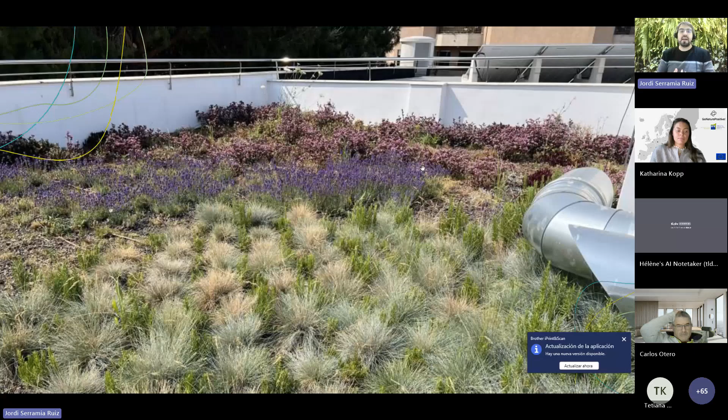So when we started making green roofs, we did this. This is a green roof with a low nutrient substrate. We planted it with this design that has rosemary, festuca, tradescantia, sedum, lavender, and everything is beautiful at the beginning. The green roof starts to grow, the vegetation expands, and we get this. This is the ideal of our green roof with the design we did.

But something is starting to happen. You can see here and here some weeds that are starting to grow. And if you do control, or if you do not do control, I don't know what happens in your green roofs, but what happened to us is...

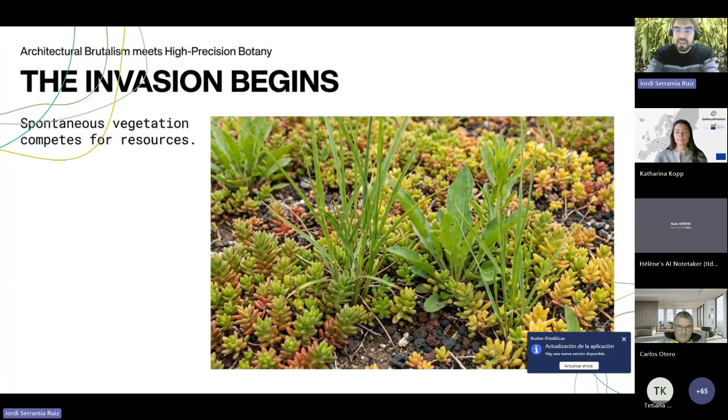Well, you might think that when I'm talking about weeds, I'm talking about these beautiful small weeds that grow in between the sedum, where you'd say 'oh, what a small weed that is growing, let's remove it.' No, I'm talking about that - this is the same green roof you see here from a different angle, and this is weeds. It eliminates completely the design of the green roof, and if you leave them there, at the end almost every original plant of the roof could die to the newcomers.

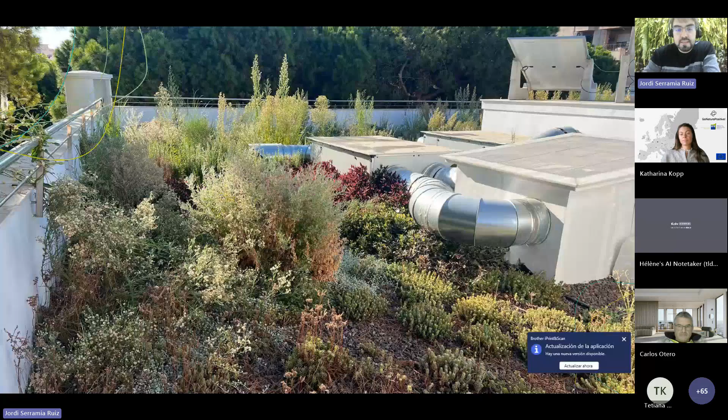So keeping the design needs maintenance, and also sometimes it's dangerous, because you can see here at the left a tree growing in a corner of the green roof, starting to grow, and you can see here the size of the weeds. It's not small weeds growing in the green roof that we can easily remove - no, that's not the problem.

I run a company. Every maintenance job is work and is business for us, but that's not the objective. The objective is to keep the green roof with low maintenance. And the ideal is that you install a green roof and you don't have to do anything - the green roof and the design keep the way they should be.

So that didn't happen in our early years of working, as you can see in these photos. But we have evolved and we have taken measures, and the measures I'm going to talk about, I think, are easy, and you all can take that kind of measures to keep the weeds under control.

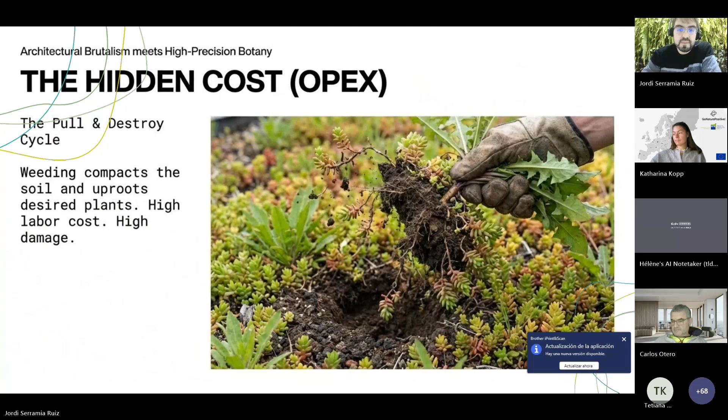We designed a green roof system called Rizoma. I don't want to make sponsoring of our system, because this is not the purpose of the speech. I think everything I'm going to talk about could be implemented in any green roof system you have.

What do we do? The Rizoma system has the usual layers of a green roof: the protection for the waterproofing, the drainage membrane, a fabric for filtering, in that case a rock wool substrate, and most importantly, a weed control fabric - a double weed control fabric.

This thing is usually used in landscaping. I don't know if you use that in your green roofs, but I have never seen a weed control fabric used in a green roof. Maybe because we are worried that a green roof should be something natural, something with biodiversity, and we think that any artificial layer we introduce in the green roof is some kind of betrayal of the ecology or something like that. I don't know, but I don't know why I don't see weed control fabrics in green roofs.

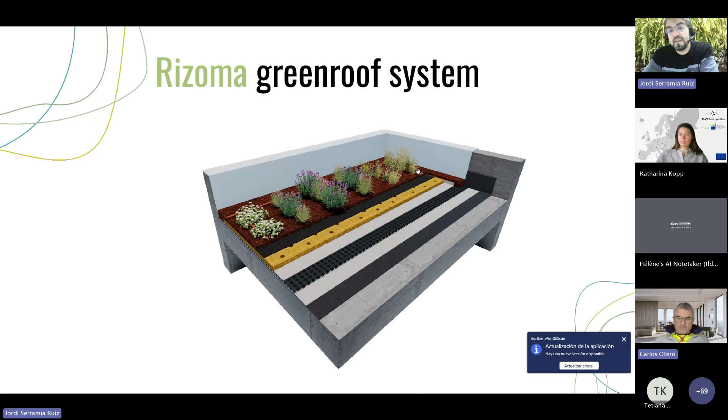Those are the layers: the drainage, the geotextile, the substrate, the weed control mesh, and the gravel. And this is how we installed it. We put the rock wool substrate over the drainage layer, as you can see. The rock wool already has holes for the plants to be planted. Otherwise it's really difficult to plant that rock wool because it's not soft rock wool that comes in rolls. It's a hard rock wool that comes in panels, and that's important for something I'm going to explain in another slide.

This is the weed control mesh, and this is the irrigation system. The weed control mesh also helps keep the moisture in the rock wool panel. So we solve two problems with only that one layer: we don't have weeds, and we lower the irrigation. I know some countries don't need an irrigation system, but in Spain it's mandatory, and lowering water consumption is very important to take into account in green roofs. The weed control fabric keeps the moisture in the substrate, and we almost halve the water need only with that layer. Then we cover everything with gravel.

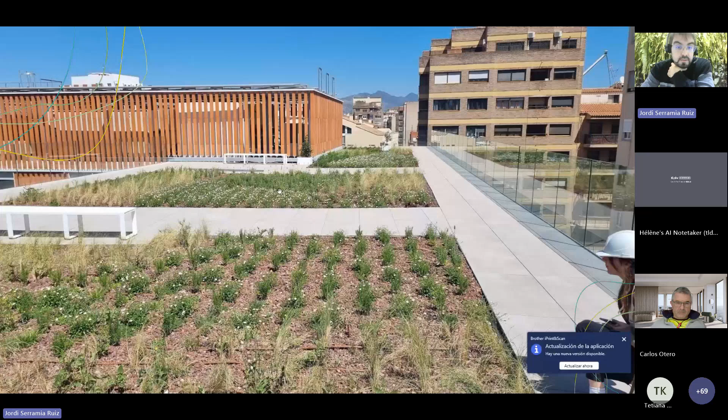You can't totally remove the weeds. There are some weeds growing, but the maintenance and control achieved only by introducing this layer makes a huge difference. I don't know what your experience is, but for us, keeping a sedum carpet with only sedum is really difficult. With that order of layers, we've achieved that. In 4 years, we can keep the sedum carpet as a sedum carpet with very low maintenance.

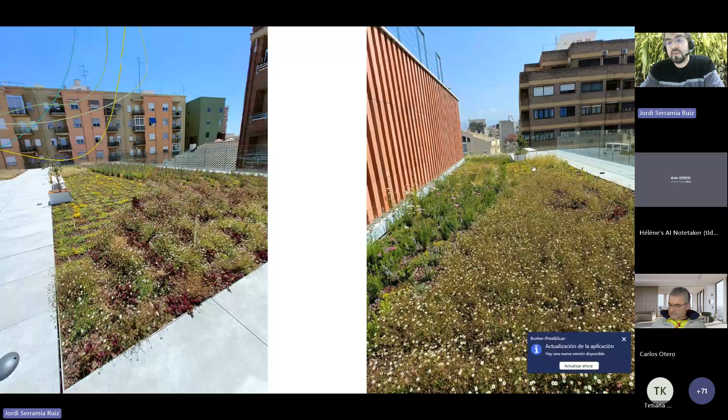This is a different place on the green roof, and you can see the lavender growing here. Sometimes the weeds grow in the same place where the plant is planted, because that's the only place where weeds can grow. But in the rest of the green roof it's really difficult for weeds to establish.

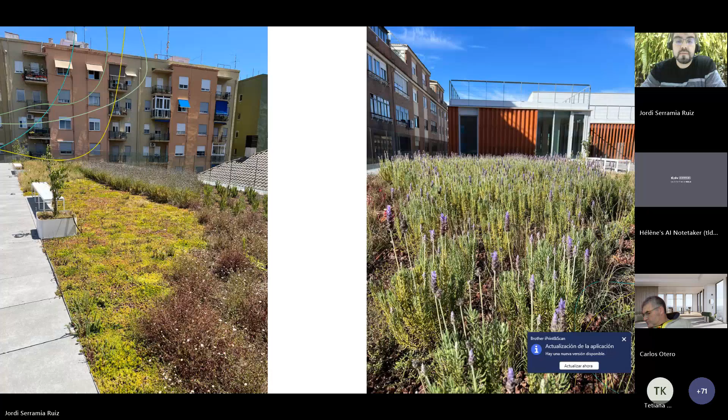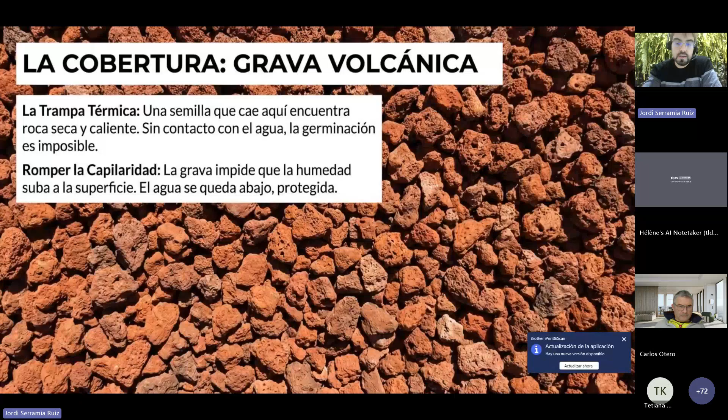The gravel is really important because it's the first barrier. It also gives the green roof weight to keep it in place, so the wind doesn't take it out. And it also protects the substrate from the sun and from evaporation.

The rock wool substrate is important because the moisture in it does not distribute totally uniformly. The moisture stays in the lower part of the substrate, so the upper part is quite dry. Maybe this upper part is 10% moisture, 90% air, and the lower part is 30-40% moisture, 60-70% air.

This is important because if you don't use a substrate that drains a lot, the moisture stays in contact with the weed control layer. If a weed seed germinates on the weed control mesh, and it reaches the substrate while the substrate is humid, it would grow anyway. So the weed control mesh itself doesn't do the job alone. You need the weed control mesh and also the substrate in contact with it to be dry. That's very, very important. Otherwise you won't achieve that purpose.

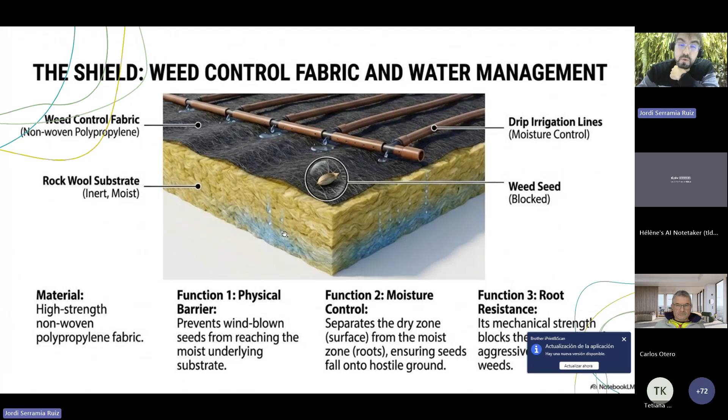We also like rock wool because we can control the quantity of nutrients in the green roof, and this is another important thing we do. The rock wool doesn't have any nutrients; we give all nutrients via the irrigation system. The irrigation system is one of the most important parts of our green roof systems, because we're able to control how much nutrients we give and how much the plants grow.

Let me show you, let me go out of the presentation. This is the remote control we use, and this is the green roof I'm talking about. You can see here all the sectors of that green roof. It has 5 sectors plus a vertical garden, sector 6.

We have some sectors with only water irrigation, and other sectors that give irrigation with fertilizer. So from here, we can remotely control how much fertilizer we give to the green roof. If we see the green roof growing a lot, or maybe having some problem with a nutrient—mostly we have a lack of iron in the green roof and vertical gardens—we can raise the fertilizer levels remotely without being there. That kind of control saves a lot of maintenance for the green roof in the long term.

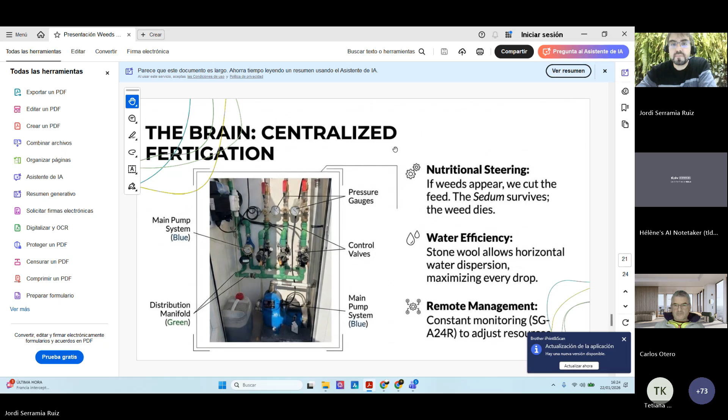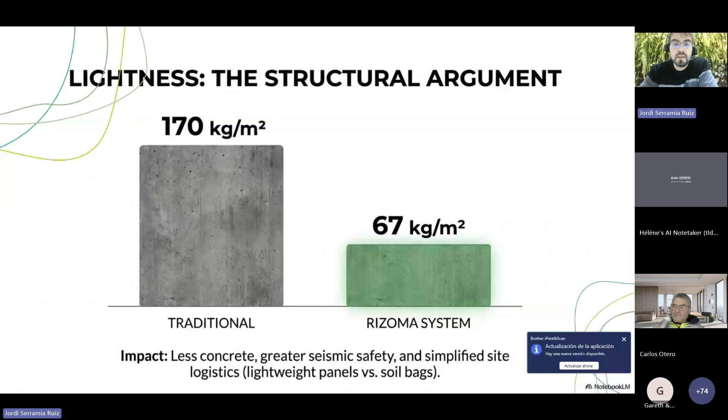Also, these kinds of systems are very light. I mean, 67 kilos per square meter is quite different than 170, which is a regular roof, for plants like lavender, rosemary and that. And this is the final image of the roof.

If you have any question, please ask.

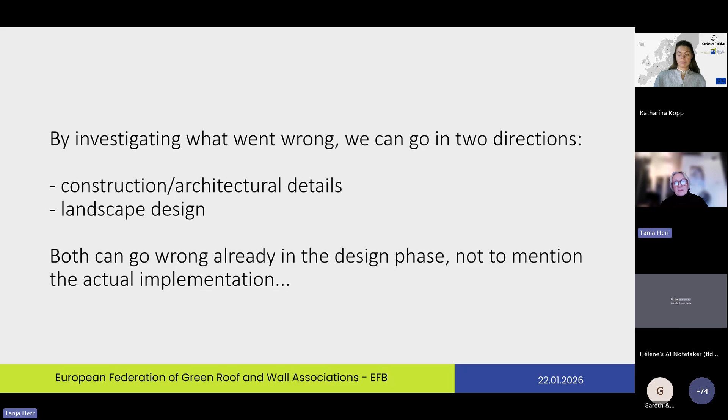I'm talking about Croatia, where we have no regulations, and although there is now substantial practice in it, there is an Eldorado for everybody that hears 'soil, earth, plants.' Then they grab what they can grab the cheapest possible, and sometimes they make very expensive mistakes.

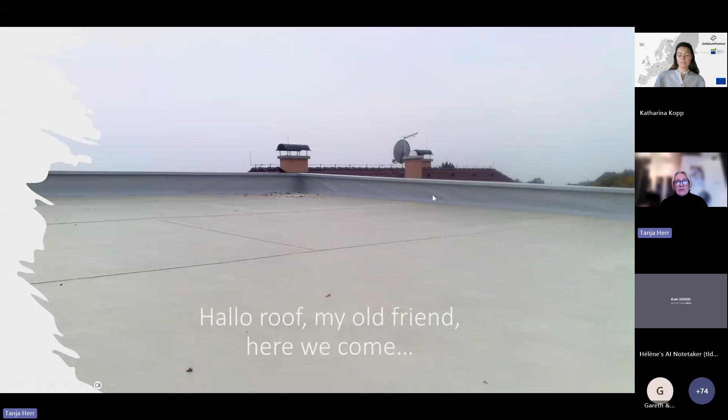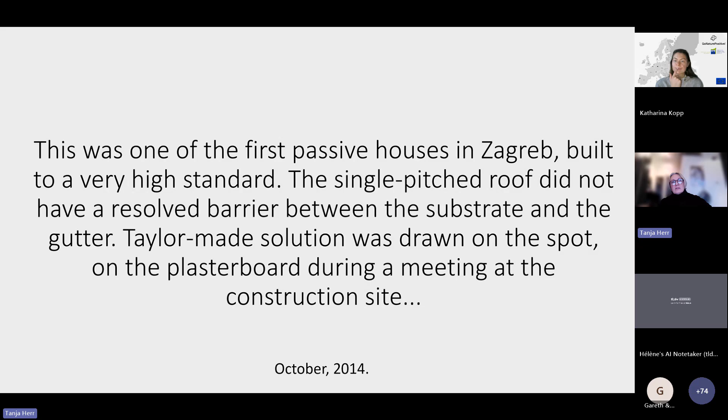So let's go through a few case studies. First one is a private house in Zagreb, the capital of Croatia. A flat roof with a slight inclination of 8%. Three sides are bordered with the attica, as we call it, so it's a little upstand, and there is a gutter at the long edge, where we were supposed first to think of something that will keep the substrate or the green roof system in place, not to slide down into the gutter.

So on one site meeting, I came up with the idea to form a little gabion, or little basket, made of perforated steel, which was equipped with, if you can see it here, a waterproofing membrane stuck to it at the bottom in a very gentle way, so it would not harm the waterproofing. It was basically fixed with hot air welding onto the waterproofing. So no drilling, no invasive attachment, you can see it's all along the membrane. It was just welded, and it was executed by the applicator of the waterproofing membrane.

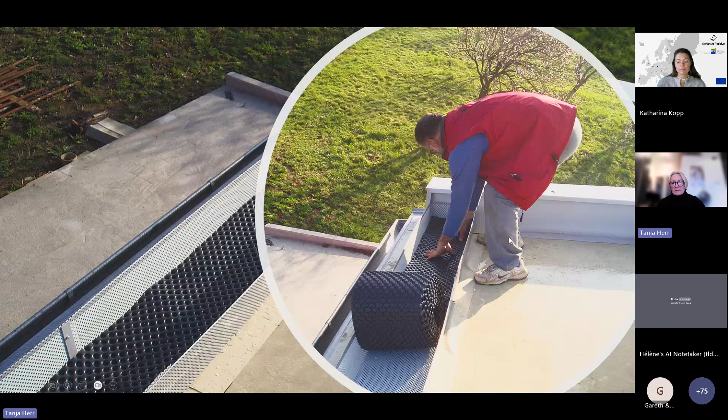Unfortunately, it was a long time ago, and I don't have the exact pictures of this site, which actually later on showed as a problem. So very carefully, we placed the drainage within this basket, where the gravel would come later on. We placed everything before the planting.

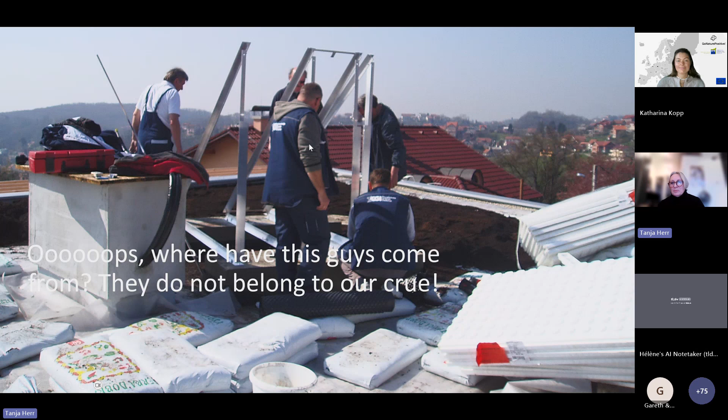Oops, then comes another company. They were just about to install some solar panels, so we said, okay, no problem, you just walk on those EPS drainage elements and use it as a base for your poured in-situ concrete, and we'll all be happy. They were happy, we were happy.

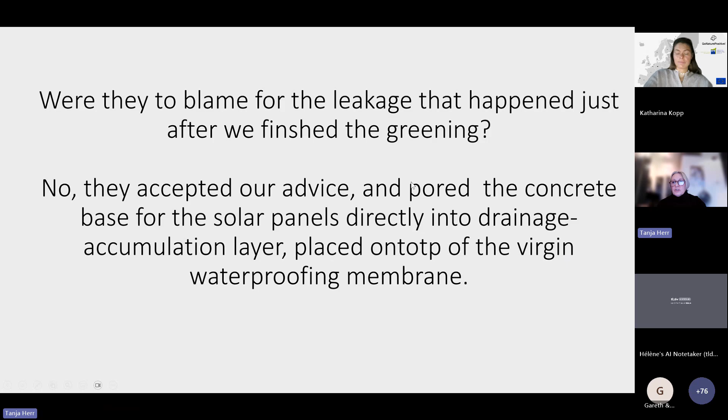But the leakage came, and we actually thought, who is guilty of it. The leakage was present here at the very edge. Why did it happen? It was because the waterproofing applicator made a very poor, clumsy detail, which was okay

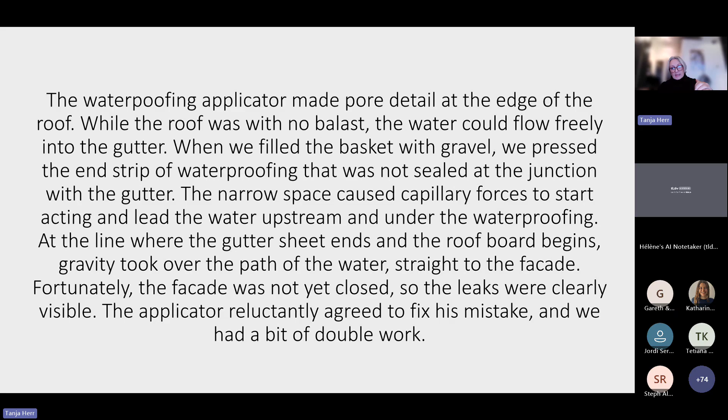while there was no ballast on top of it. Once we put gravel on it, we created a tiny space which caused capillarity to drag the water upwards, and when the water reached the place where it could go down again due to gravity, it actually leaked onto the facade. The installer was not happy when we claimed it was his mistake, but he did it.

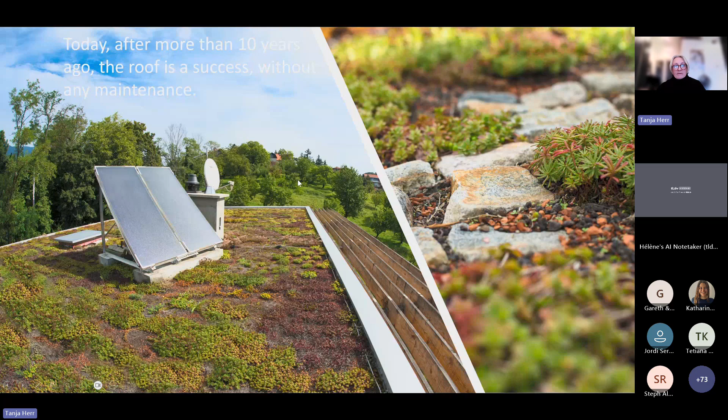no maintenance there whatsoever. So the next case study is the reception of a very prestigious hotel in northern Croatia, where I haven't seen a messier building site than this one. There were 3 new buildings, and this is the old building.

So they connected the old and new buildings with a green roof, under which there was a reception area and a congress hall, so a very posh area. One needed to be very careful. But due to these adjacent old buildings, the green roof substrate for the real English lawn could not be thicker than 10 centimeters, at most.

So we used something rather similar to what Jordi explained previously, just another system. There were dripping pipes sewn into the geotextiles, 2-3 layers of geotextiles, and this is actually the base which enables this beautiful grass to survive on such a thin roof system.

The problem happened when we put the grass on it. You probably all know that you need to water it intensively for the first couple of days or even more, and this is when the leakage happened. It leaked around the water outlets.

Why did it happen? It was due to the wrong tool that the applicator of waterproofing used when connecting the water outlets and the waterproofing. He made very dense zigzag seams, which created capillarities, which later on were not discovered when the waterproofing was inspected by leaving water sitting on the roof for 24 or 48 hours.

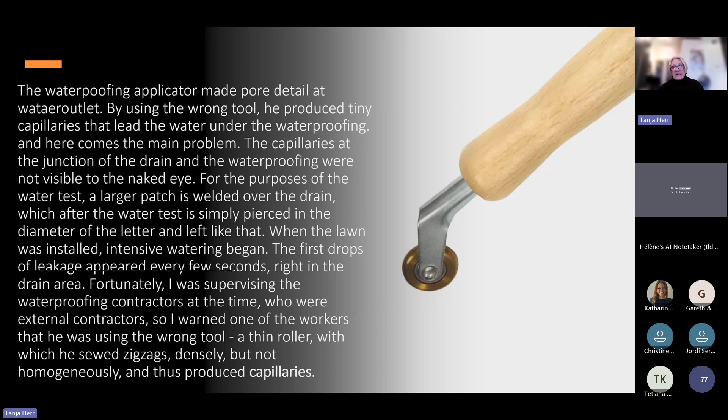Unluckily, because of these capillaries, when you watered the greenery on the roof, the water had access, and it was sucked within those capillaries, and it leaked every few seconds, a drop - it was a nightmare. So we solved this nightmare, and soon enough there was another one.

There were skylights which were covered by the waterproofing membrane until the glazing came. The glazing people came onto the site, cut off the membrane, the rain came, ran off the roof, and the manager of the hotel called me. I was 80 kilometers away from this building, and she said, 'Tanja, it's pouring, it's horrible, what have you done again?'

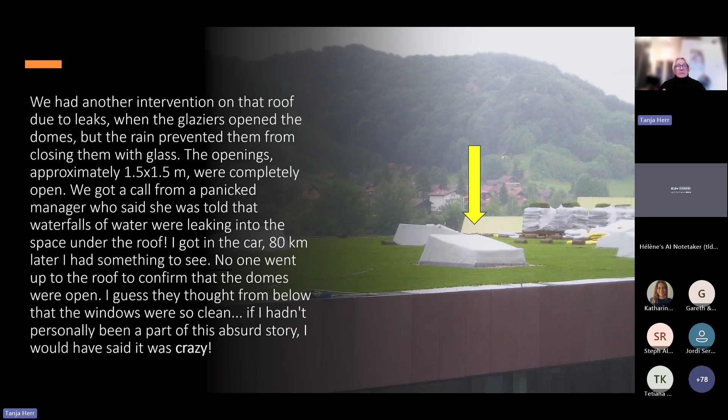So I drove there like crazy, because nobody went on the roof to see that these openings, 1.5 meter by 1.5 meter, were absolutely opened. From downstairs, they probably thought it was the glazing so clean, or I don't know what.

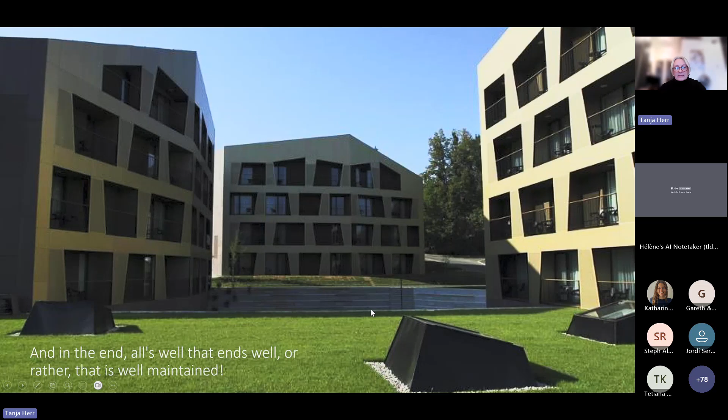But anyway, everything is well that ends well. So this roof was, in terms of leakage, sorted out, and we were happily gone. There was another thing which I will talk about later, again with this glazing, but this is actually another problem. So let's go to the next case study.

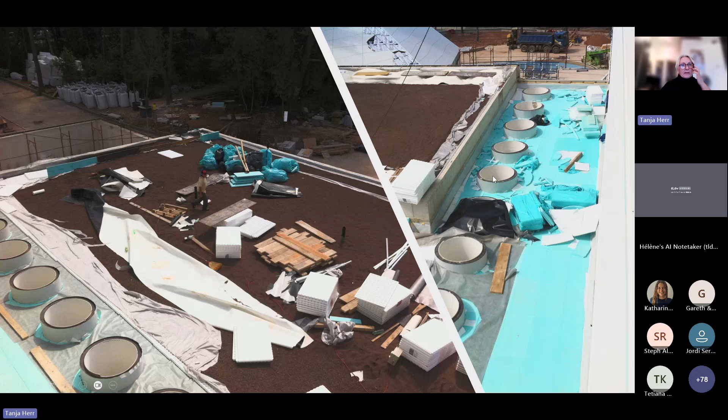Again, a hotel, and a very beautiful design. The architect was very proud, and there was a company that tailor-made those skylights, and there comes the problem.

We've got beautiful protection of the waterproofing membrane executed by XPS, which is a very welcome application. But as you can see here, all these bits and pieces, it was the pressure of time, non-skilled workers, and they were really having a hard time making a nice, round, tight surrounding of these skylights.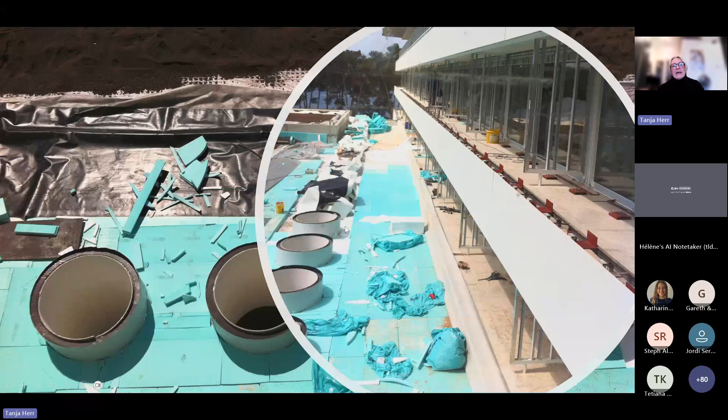So what they did, which was not seen before the landscape company came on top of it - they covered it with geotextile, and they made cuts exactly on the very top of the XPS. These cuts were smeared by some paste or something, which was later discovered when all this beautiful roof needed to be taken down, and everything needed to be repaired.

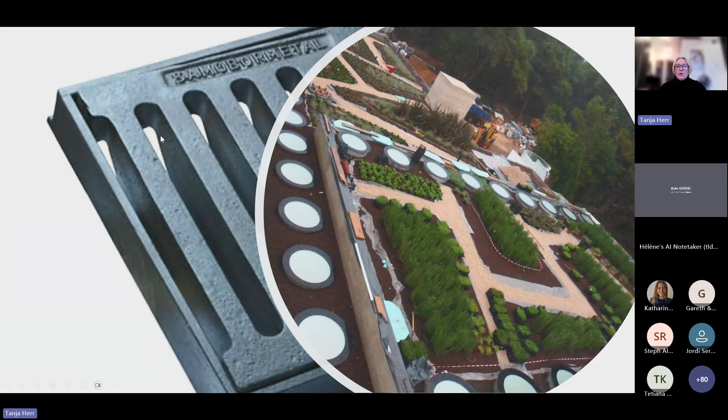Messy building site, rush, non-skilled workers, and another clumsy detail: people who gave the coverings for the inspection chambers.

They put the wrong ones with very big openings, and you can see here this is a Mediterranean pine forest. So over the course of 1.5 to 2 years, the needles went into the water outlets underneath and clogged them. One very heavy rain brought the water level up to those sensitive areas where the installers had cut the membrane and tried to smear it with some non-good solution.

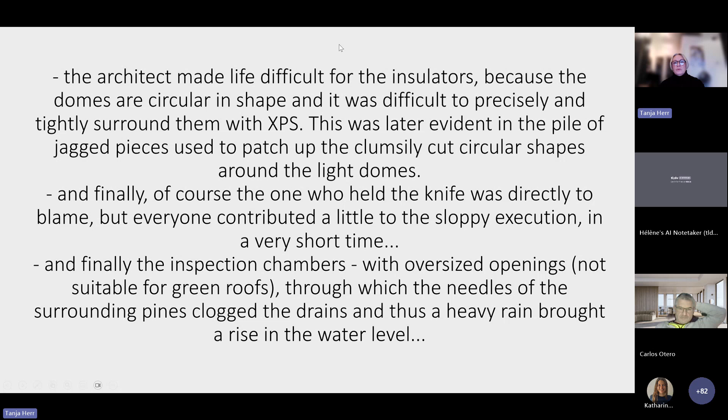I described what I just spoke about as a reminder that there's a mosaic of guilt on this project. The architect who made the skylights rounded, they could have been squared - squared skylights are much easier to insulate properly. Then there was the investor who kept changing his mind until very late, but the opening date of the hotel was fixed. So everybody was in a rush, and some workers were brought in from God knows where. When it came to who was actually guilty, of course the hands of the guy holding the knife are directly guilty, but all the others are also responsible for it.

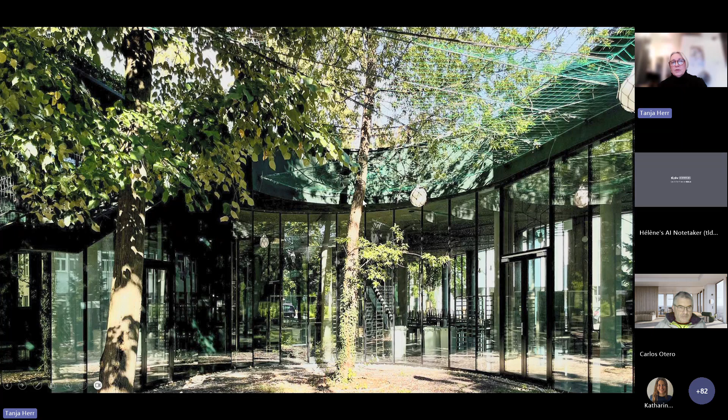Let's go to a very funny, very beautiful, but also a funny case study - this cantinetta serves students of the agriculture and forestry faculty in Zagreb. Nicely done. There was a plan to have containers on these posts for guest professors. This was never built, but for those containers, if you can see the little bump here, they provided pipes for sewage and water.

The only solution we tried to implement on site - this was with my colleague from the XPS company - we said, okay, can you at least split the thickness of XPS into two layers of 5 or 6 centimeters rather than having all the XPS underneath the membrane. This would help with further maintenance so the green roof could be maintained safely, while the waterproofing would also be protected. Little did we know how this would end at the end of the day.

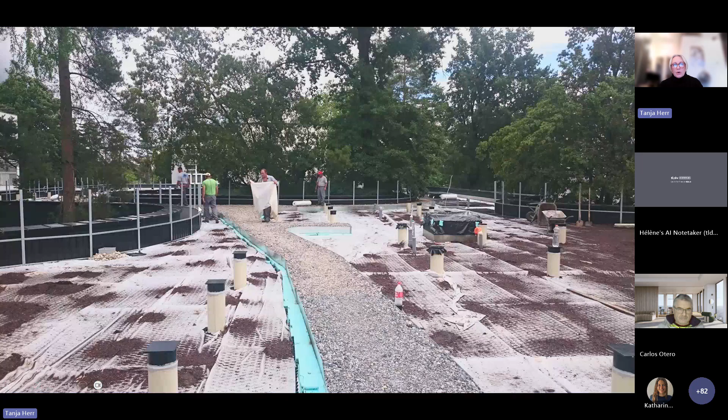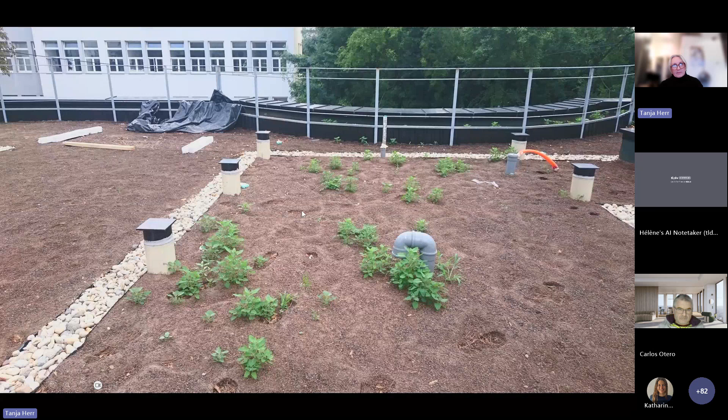All these layers were placed, some 30 centimeters of substrate, and everything looked perfectly well. Until one day, because the dean of agriculture and the dean of forestry could not make up their minds, they were not very keen on giving money for the plants themselves. So nature took its way - this became almost a meter high grass.

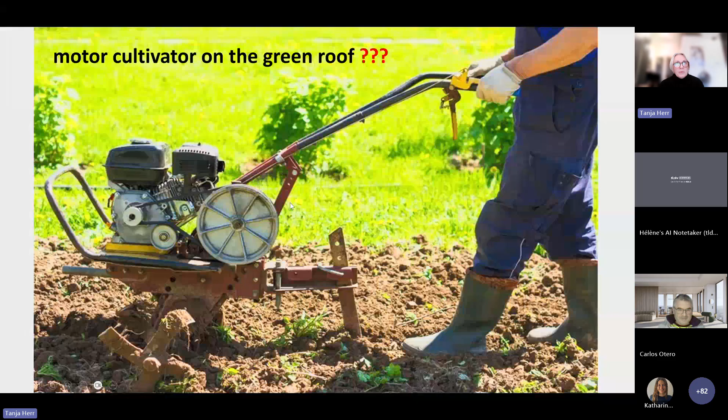A very skillful majordome of the faculty came with this device onto the roof - this picture was taken from the internet because I did not see it happen. I just got a furious phone call from the architect saying, how much substrate do we have on this roof? I said, well, roughly 30 centimeters. He said, do you know what this idiot did? He hit those pipes - they weren't filled with water, but he actually cut the membrane.

The edge of the roof melts with nature very beautifully. Those containers were never built there, but the maintenance is, yeah, not the greatest ever. This would happen when people bring such devices onto the roof - it should be forbidden. But once the architects and gardeners are gone, the people who maintain the building don't necessarily know what's underneath. So these are examples where the building or architectural details are to blame for something that went wrong.

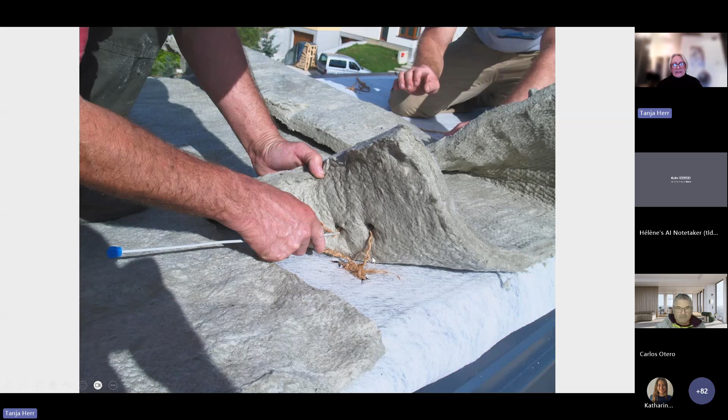What about the green roof systems? There's a small design first implemented in Croatia with this mineral wool, similar to what Jordi explained. We didn't know how to fix it on such a metal roof, also very much inclined, so we made a dimple membrane with laces like shoelaces which would later serve to fix the wool on it. We glued this dimple membrane onto the metal deck, and on site we were actually inventing the details. You can see the knitting needle we used to fix the mineral wool on top of it, because it's a very windy area.

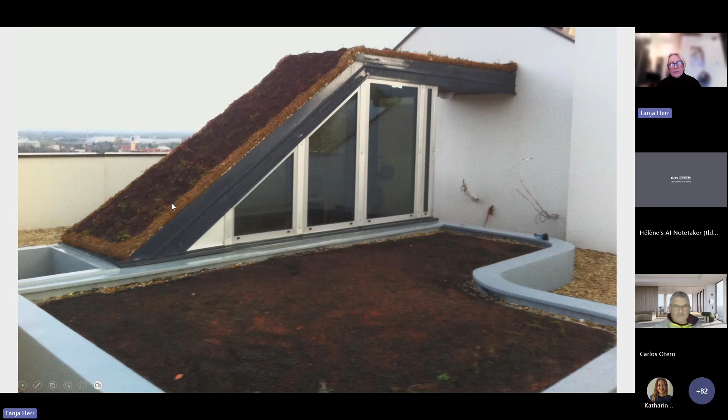Once done, we put the netting on top, planted the plants, and all looked well for the time being. We hoped the plants would grow over this visible part. Unfortunately, it did not happen like this, because the owners did not take care of it.

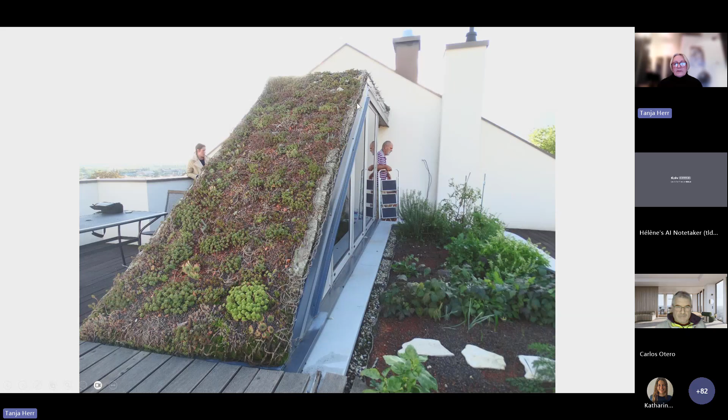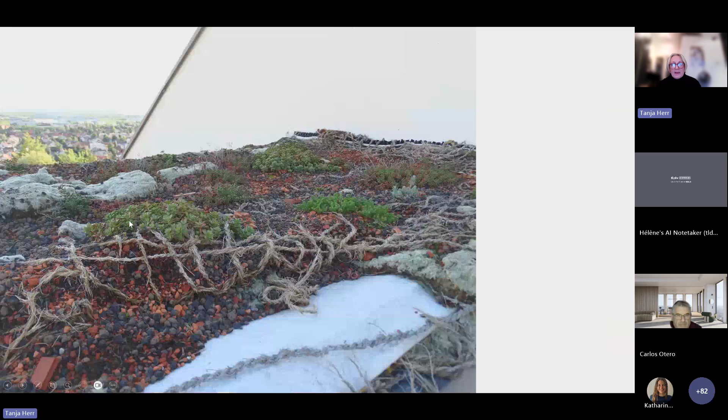They did not water it. The wind and degradation of the coconut mesh was already present on this sloped area, but on the very top it was the worst. So one storm came and it all went, almost completely gone. So how to maintain it?

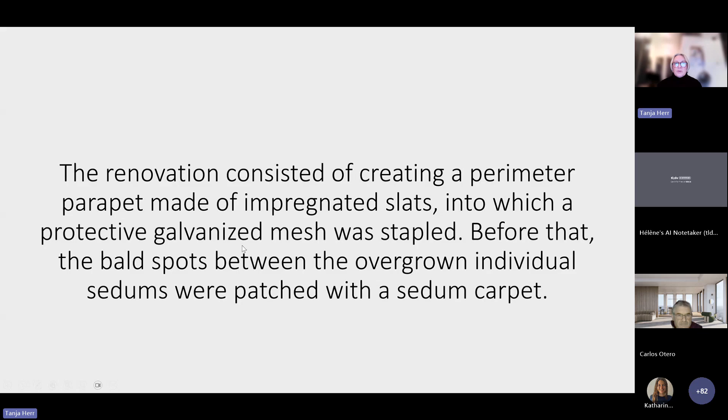First we installed some wooden slats to serve as the base, where we later put the netting, which will prevent the wind erosion, but also the soil erosion.

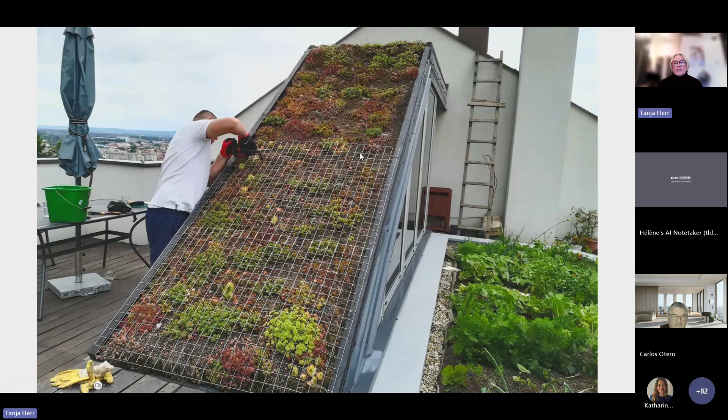We also instructed the investors that not only the carrots and paprikas and whatever they had in this roof garden need to be watered, but these modest plants, the sedums, are also to be watered when needed, because we live in a continental climate where the temperature can rise nowadays up to 40 Celsius degrees in the summer.

So now it looks rather neat, and it's also secured.

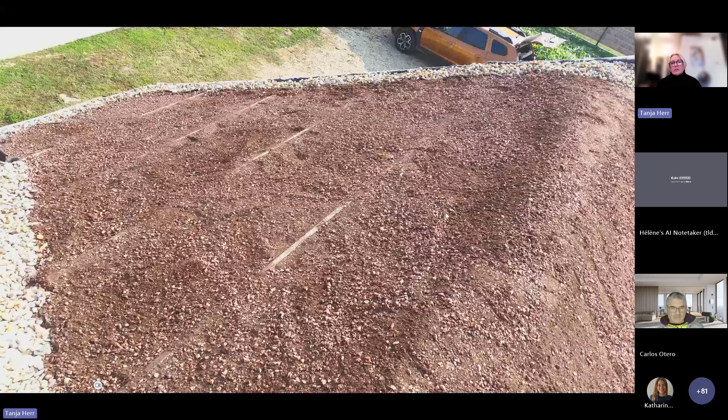We removed what it was possible to remove, put the new one enriched with another component, took the sedum carpet. This was silly me, without any protection on the roof, some 8 years ago. Today I wouldn't have done it. And this was the roof straight after installment.

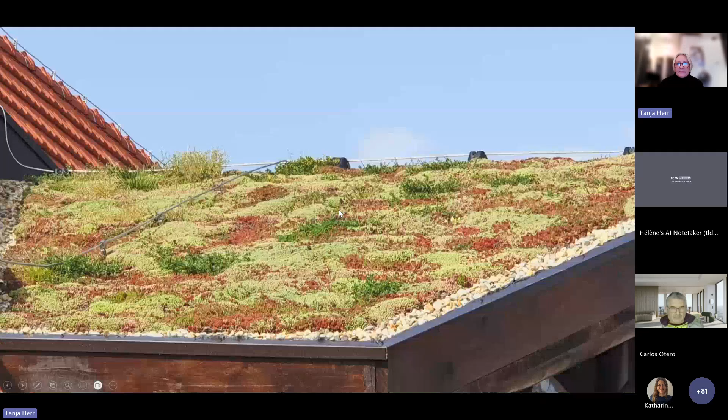Half a year later, the roof survived. Here are some weeds that actually inhabited it, but today we will not call it weeds. We will say the biodiversity took place on this roof. And so far, so good.

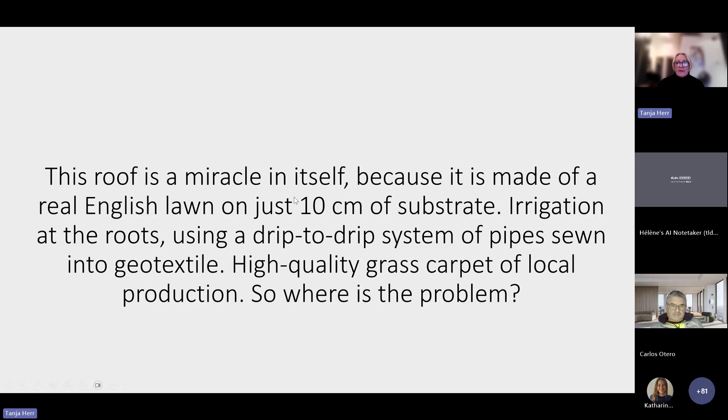Let's go to another hotel. This is actually the same hotel I mentioned previously. Now there is another problem where they told us that the grass has gone yellow.

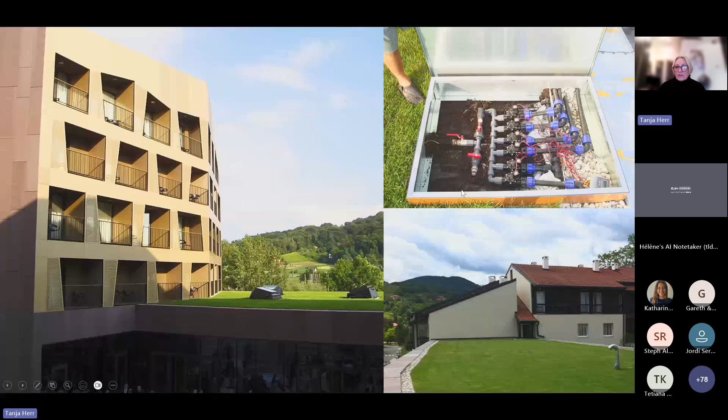It burned. How did it burn? It looked all so nice. We also have a nice and clever watering system. Everything looked perfectly well, but the dry patches were here because the glazing came much, much later, after the opening of the hotel and after we finished the green roof.

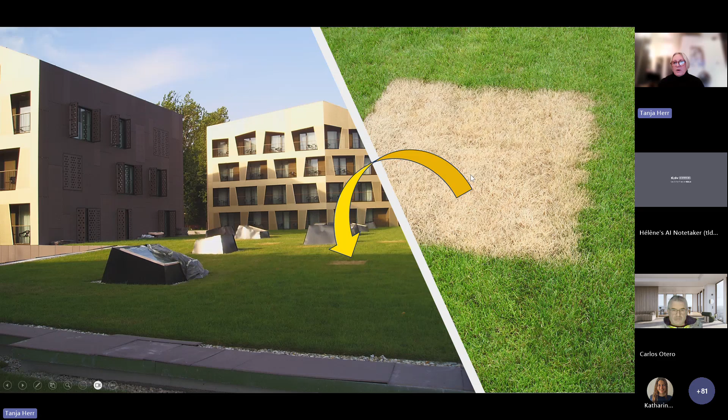And the people took the glazing, which is, if you remember, 1.5 by 1.5 meters big, and put it on the grass, and worked the whole day long on these metalworks. And then, of course, the grass - you can see the precise shape of the glass was burned under the hot Croatian sun. So this was actually very nice for the opening.

We repaired those green patches, and cheers to the hotel. And it seems like I've finished, although I thought it would last longer.

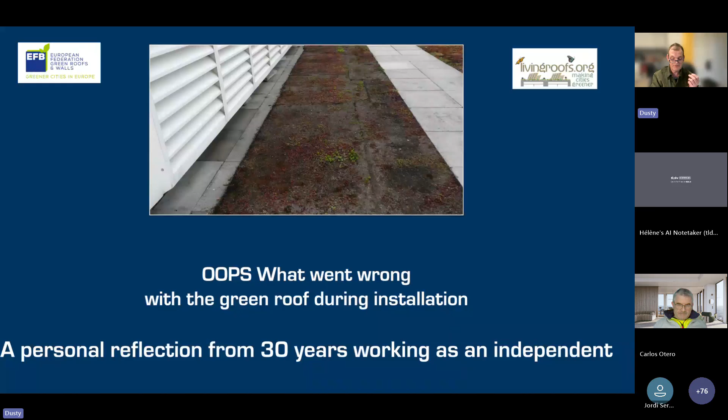Great, so I'm just going to tell you a little bit about me, because it's going to put into context what I'm going to talk about. That roof was 20 years ago, it's a very simple sedum blanket, never irrigated, and very exposed to the wind. I was the president of the Federation. I like to put this picture in because years ago I was a punk.

I'm one of the UK's leading experts, independent of any company. I think this is very, very important. I've designed, specified and inspected thousands of green roofs across the United Kingdom, and I've actually visited thousands of green roofs all over the world. Nearly all the policy and guidance written in the United Kingdom has been written by myself and my colleague Gary Grant, for people in the UK. But this is very, very relevant when I talk about where things go wrong, because we're talking about policy and delivering what cities and the English government wants. Last year I inspected all the City of Westminster's own green roofs, which is very, very interesting. So I went from being an activist to an expert. I wrote all these reports, all this guidance, but more importantly is this biodiversity net gain metric, which is a legal requirement in England. Essentially I wrote that metric, and it's in line with the way that they often do green roofs in Switzerland.

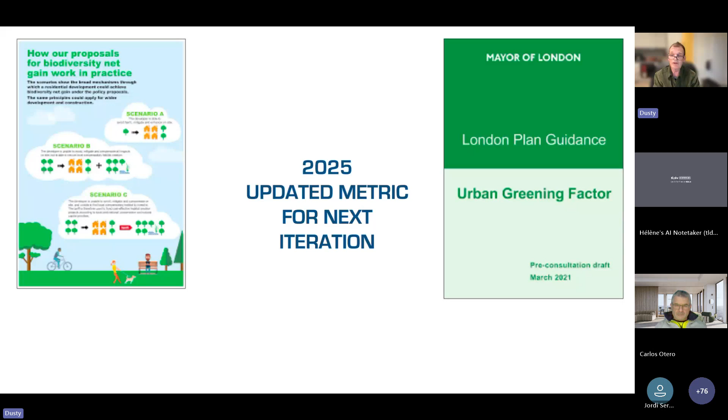And it's important to say this because of the context about what goes wrong. I've just updated the metric for the next iteration, which I'm not sure when's been published. So let's take the title, During Installation.

Just quickly to back up what Tanja said, generally green roofs don't cause a problem. It's generally waterproofing, bad structural design, and the green roof gets blamed because it's seen as new and modern, and therefore it must have caused the problem.

I noticed there's some people from Recover Roofs on this talk who are from Boston, and I know quite a few Boston contractors in the United States of America, and most of the really good green roofing companies in the UK now do a leak test before they install. But I'm not going to cover that.

Most of the problems that I encounter, and clients encounter, or local authorities encounter, is actually before anybody's even got on the roof. It's the design and specification. And most of that is done from an aesthetic or a structural perspective, and it's not from a functional perspective.

I really want to celebrate Tanja here because she did say something in one of her case studies. In the construction industry, everybody goes for cheap. And there's a lot of cheap out there, and that can lead to problems later on.

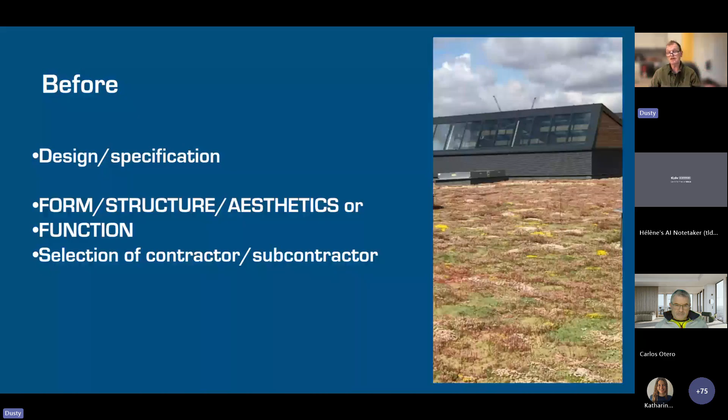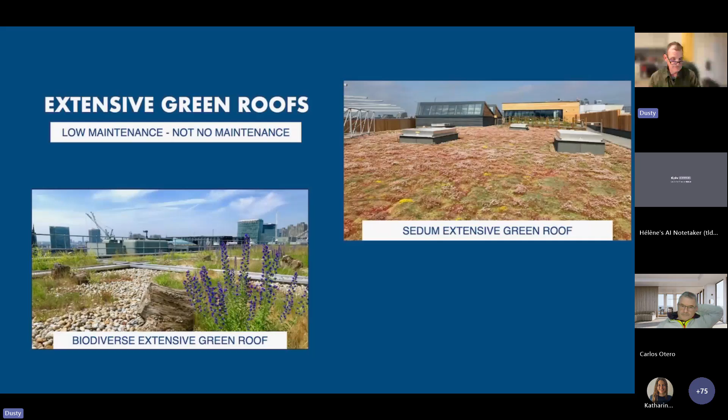I'm going to very specifically talk to you about what is the driver now in the UK, which is not sedum extensive green roofs, but biodiverse extensive green roofs according to the metric. The design and specification for most architects, clients, and structural engineers is: keep it as light as possible, make it look as good as possible, but with as little maintenance as possible.

The way it should be approached is actually function and performance first, not weight and aesthetics. They come later. But that is generally how most green roofs are specified and designed, unless you've got strong policy and guidance. Now, this is a classic example.

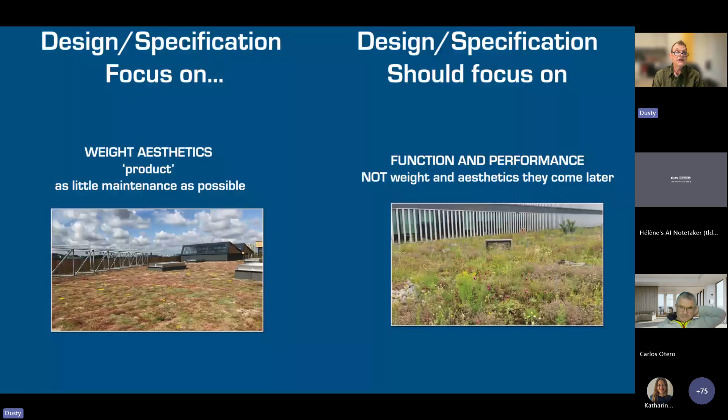This is a system. It remains nameless. This system is 44 kgs per metre squared. And this is on a balcony, which has actually got planters on as well. So this system was specified because it was light, and it was specified with irrigation.

This system at that thin needs virtually constant irrigation daily to stay alive. And that means it's not an extensive green roof if you follow the definition, because if something's being irrigated daily, it's an intensive green roof. I just want to highlight that because that's the original definition.

If intensive green roof is high maintenance, extensive is low maintenance. Now, you've got a nice publicity shot, but nearly every time I've encountered this system, which is so thin, it's virtually dead. And that is because weight and a publicity document was what drove the person to buy this product.

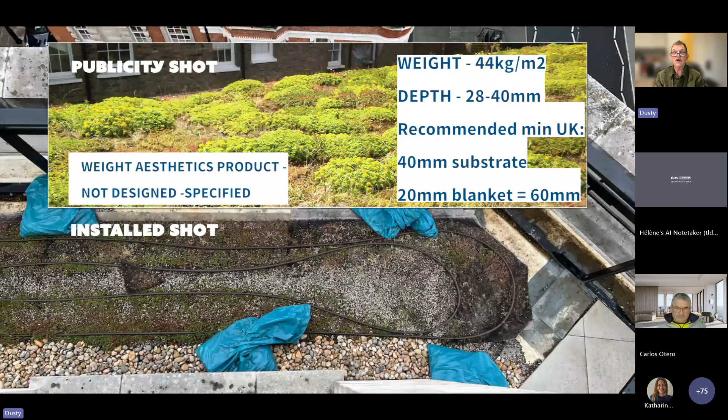And this is a very similar system. As I said, in the manual, it says should be irrigated in periods of hot weather. Now, I don't want to bore people, but I'm sure people who know buildings in facilities management...

That is, the people who manage buildings - if in the manual it says 'should', that doesn't equal 'must'. And I spent years talking to facilities managers who say, if it says must, we will do it. If it says should, we probably won't. And so that's a very key point, that is.

And I would suggest to people, if you want to make a green roof that's going to last, you focus on function and performance. Performance values are key, and they're going to be key, certainly in the European context with the new guidance that a few of us have been involved with writing for the Commission. We want good water holding capacity, survivability of plants.

Now in London and England and Switzerland, it's biodiversity. So there's a lot of malherbs, if you don't mind me saying, Jordi - a lot of things that maybe people don't like, but that is the way that the BNG is written. But it's got to have low but healthy maintenance.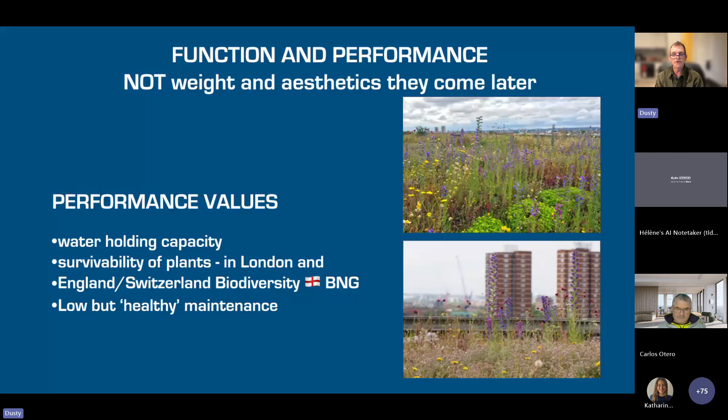And what people do when they hear low, it often means no. And one of the problems I have is I specify a lot of green roofs to meet regulations. And again, this is all going to be nameless.

The system suppliers then play on the insecurities of the architects and change the specification. This is a green roof that had 80% wildflower turf put on it. It was not designed like this. I was asked by both the local authority and the client to sign this roof off. I refused because it didn't meet the specification that went through planning. This happens a lot, and I think again it was aesthetics rather than performance that was the architect's insecurity. By the way, this system increased the cost by about 60%, so it's a cost issue as well.

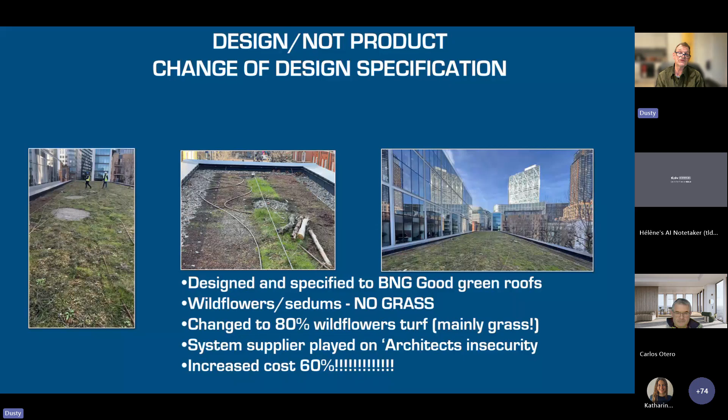Now this is very controversial. This is a really lovely, fantastic green roof I visited in Italy, with my friend Maurizio Crassa, who's our Italian rep and has a company out there. I visited this roof during an irrigation ban in northern Italy because of lack of water. It was actually May, June, and the grasses died and the client wasn't very happy.

Now one of the things in our guidance and our metrics is no grass. People get very upset about this, and ecologists will say, oh, if it's not got grass in it, it's not a proper ecosystem. One of the problems with grass on a green roof is it needs a lot of irrigation to not go brown. If you go out to some of the natural landscapes, this is a chalk grassland. There's calcareous grasslands all over Europe, north, south, east, west. When you have really good chalk grassland, it only has about 10% grass in it, mainly wildflower dominant.

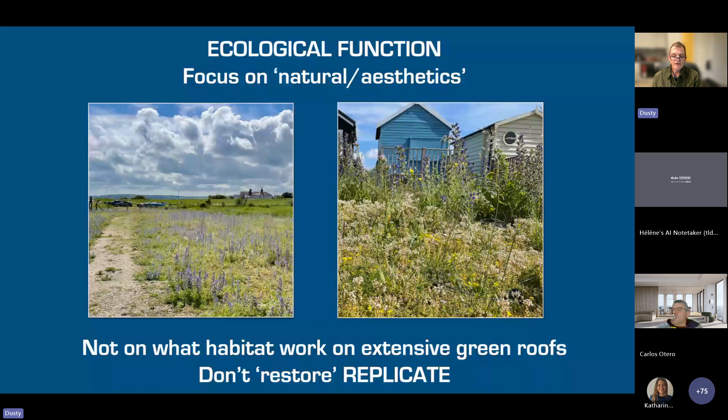I'm highlighting this because this is a cockleshell beach in East Kent, where I'm from, and this is what a green roof should look like in the summertime. You can see on the right-hand picture there's a lot of sedums, 4 species of sedums on this, but no grass because the grass can't survive in the cockleshell. What I'd say to designers is we have this perception of what is natural, and that's often associated with agricultural land, which has grass. So don't restore, replicate. And I've got a whole...

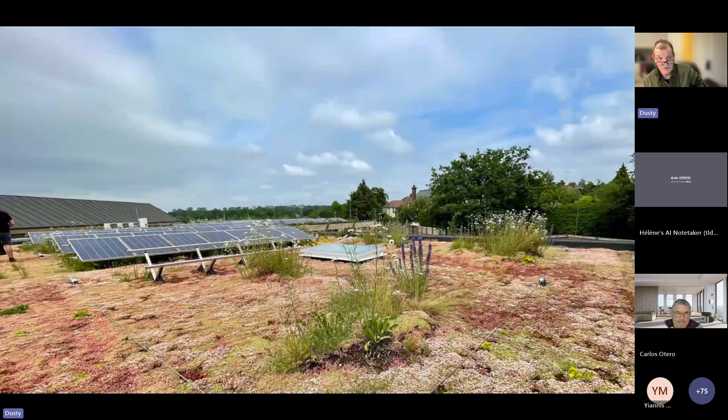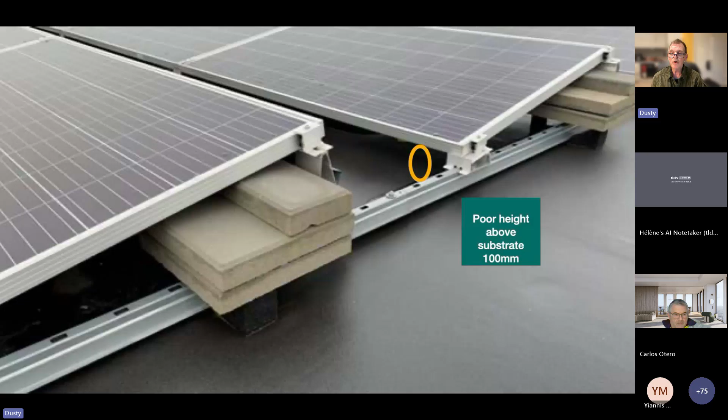I did say I'd speak a little bit about biosolar in terms of what goes wrong, because there are a lot of problems with biosolar if you specify the wrong solar system, and we get a lot of this all over Europe. This is a solar mounting system designed for a non-green roof, and you get poor height above the substrate. What happens is water runs off the solar panel, goes under the panel, and woody stemmed plants, which you shouldn't have on an extensive green roof, can take hold. They can block out the sunlight and stop the panel functioning. Generally, in most installations, if one panel goes, all the panels go.

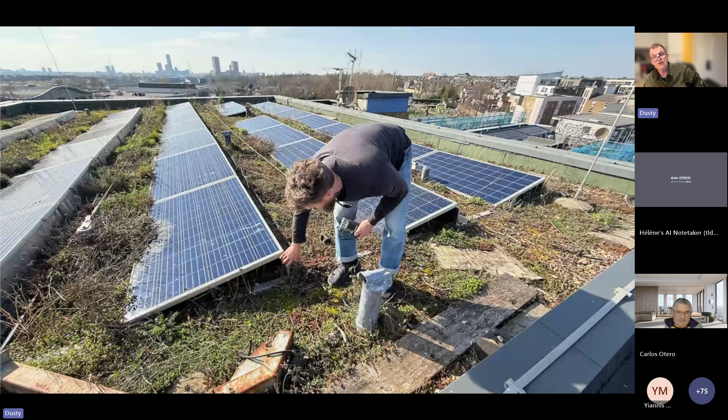I'm now going to show you a picture of a really bad biosolar green roof. Oh, no, not that one, this one. This roof never produced any energy because they forced the green roof around it, and the solar panels are the wrong height. Going back, some people from Recover might know who this is - this is Peter. I inspected these green roofs in Westminster, and these have got the wrong mounting systems on them, and already the vegetation is starting to cover the solar panels.

So one of the things that goes wrong is people say, oh, there's a solar mounting system, we'll use that - but was it designed to actually work with a green roof? The other issue is the solar engineer wants to maximize the amount of solar panels, but you can't do that on a good biosolar green roof. You have to have at least 40%, and I'd prefer 50%, without panels on it. If you get that, you get good spacing between the panels and fewer woody stem plants.

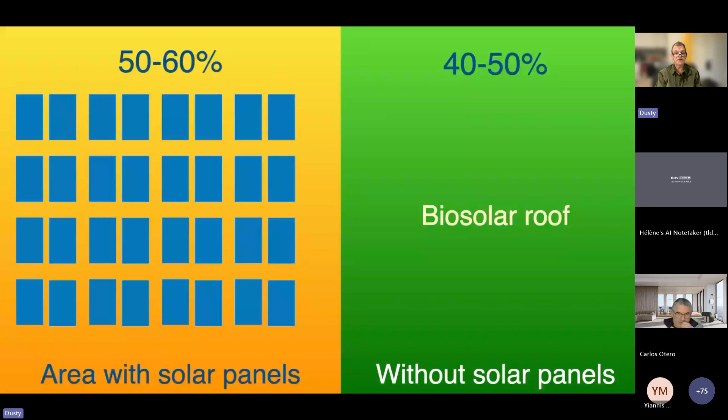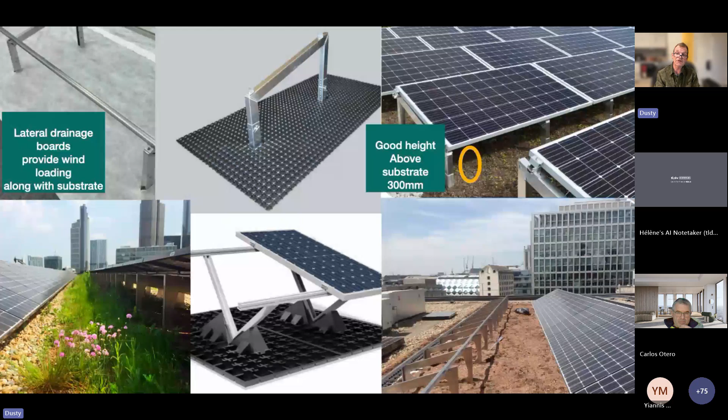I'm highlighting this because there are a lot of very good systems - there's 3 I know in Europe, actually designed specifically for green roofs, called integrated solar panel green roofs. I don't need to highlight the companies, but that's the way to go forward if you want to design a really good biosolar green roof. You can see a very good biosolar roof that I'm going to do a video of shortly, just showing the mounting system, which is integrated into the green roof system - that's what's important.

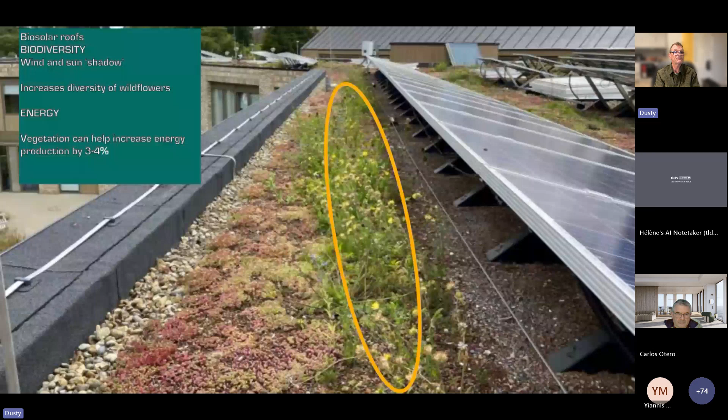When you do that, you get good energy production and good biodiversity, which is what I'm specifically interested in. So think function, not weight and aesthetics first. Weight and aesthetics come later, not first.

Keep grass out. Ensure the roof is designed, not just an off-the-shelf product, because green roofs are an ecological landscape, not a building product. Inspect what's going on, because I have to try to inspect whatever the contractor is going to install, and does it match what was specified? Then I inspect the installation, and then I sign it off.

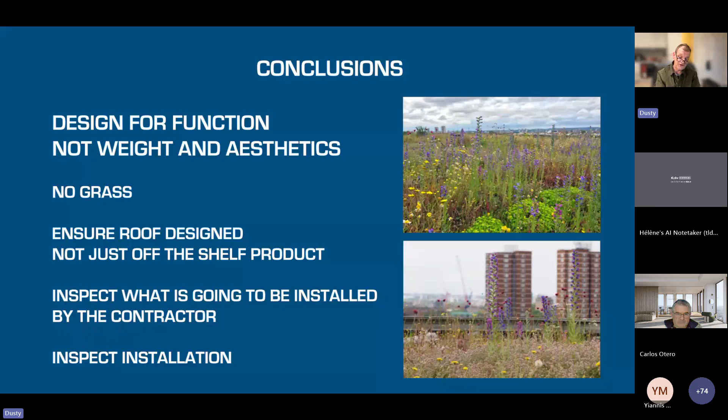Thanks very much. As I said, there are lots of YouTube videos about biodiversity and green roofs and habitats across the EU, and now actually across the world.